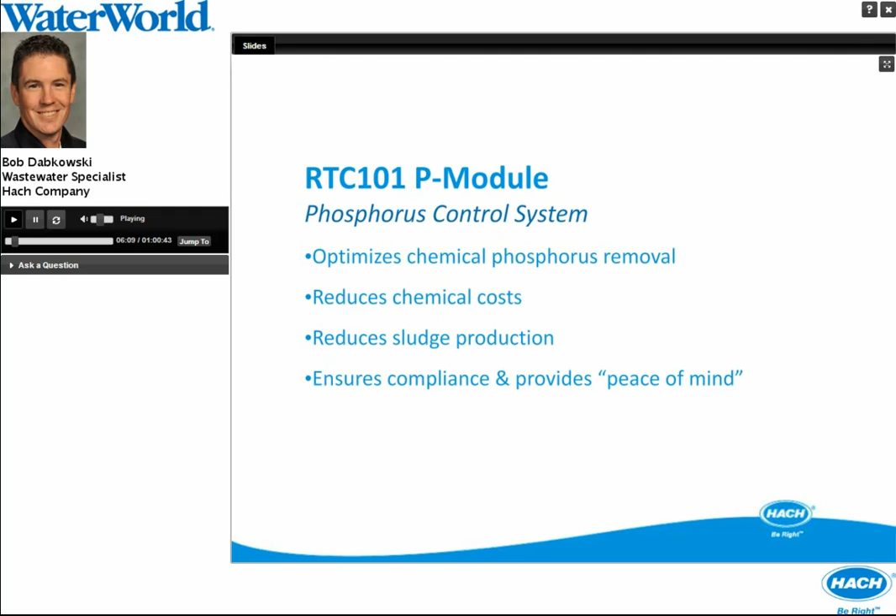So what does it do? What does it look like? Well, the chemical phosphorus removal controller starts with an orthophosphate analyzer and a sample preparation system. We use the Phosphax analyzer, that's a Hach product, and the Filtrax, which is a 0.15 micron filtration system that can be immersed directly into the basin, into the tank, into the channel, wherever you want to pull a sample from. It filters the sample and delivers it to the instrument. They're designed to work together.

That's connected to an SC1000. The SC1000 is our transmitter, our controller, depending on your language. This is the interface for the Phosphax analyzer where you can set your output signals, you can make manipulations to the settings of the instrument, change the display, things like that, and different communication capabilities such as Modbus, Profibus, wireless, Ethernet, etc.

And the third component is the actual RTC, or real-time controller. This is a device which basically, for those of you in the control world, is a mini PLC. But contained in that mini PLC are input cards, so we can pull, say, a flow measurement from the existing PLC, and an output card, which has a 4-to-20 or Modbus output for the dose of chemical in real time. Also inside of that are the actual algorithms where we're performing the math and updating the output every minute. Typically that RTC unit gets installed in a PLC cabinet. That way when we're pulling signals out of the existing PLC and putting them back into the PLC, it's very simple, right? We can just use the existing wires, inputs and output cards.

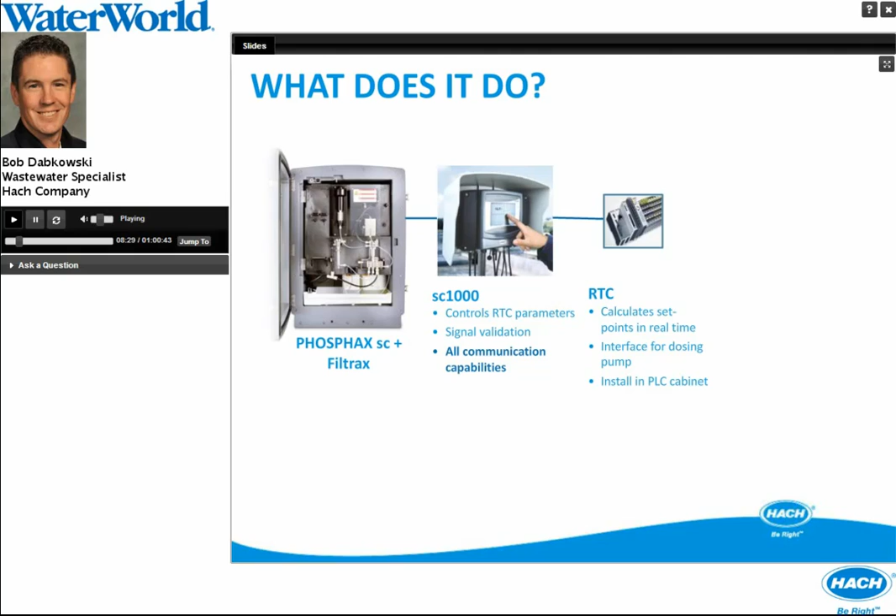It doesn't always have to be plugged into a PLC though. For this particular module, if the chemical feed pump, say, can accept a 4-to-20 milliamp signal, we can send that directly to the pump. It doesn't have to go back into a PLC. Those three components are what we supply.

What we also need is a flow measurement. Whether it's influent to the plant or plant effluent flow, we need a flow signal because, of course, we're talking about phosphorus loading. We're not talking about just concentration. And then the output from that RTC goes either back into the PLC to control a dose pump or directly to the pump itself. The pump that, of course, is adding our ferric, our alum, polyaluminum chloride, etc.

And last, but certainly not least, are services. With this real-time controller and the SC1000, we have the ability to access and view this system remotely. So the benefit there is our tech support people can dial in once a week, check on the system, make sure everything's functioning correctly, make any changes that may be necessary, of course, with end user permission and the client's permission, and also put together and compile the data and issue a report if that's what the end user desires. That ongoing service is included in the RTC package. The nice thing here is it's one point of contact.

For example, if we were to build one of these systems from scratch, I like to use the analogy that if I want to build a thermostat to control my air conditioning in my house because, gosh, it gets really hot here in the summertime, I could go down to Radio Shack and buy components and circuit boards and everything I need to build my own thermostat. Or I could just go down to Home Depot or Lowe's or Ace Hardware and buy a thermostat off the shelf, right? The difference there, though, when you think about that analogy is that if I build a thermostat from scratch, if something goes wrong with it, who am I going to call? I have to go and troubleshoot it. And what if I'm out of town and my wife calls and says, hey, the thermostat you built, it's not working. Well, I'm out of town. I can't help. Same thing, when we build systems from scratch, who do we need to support them?

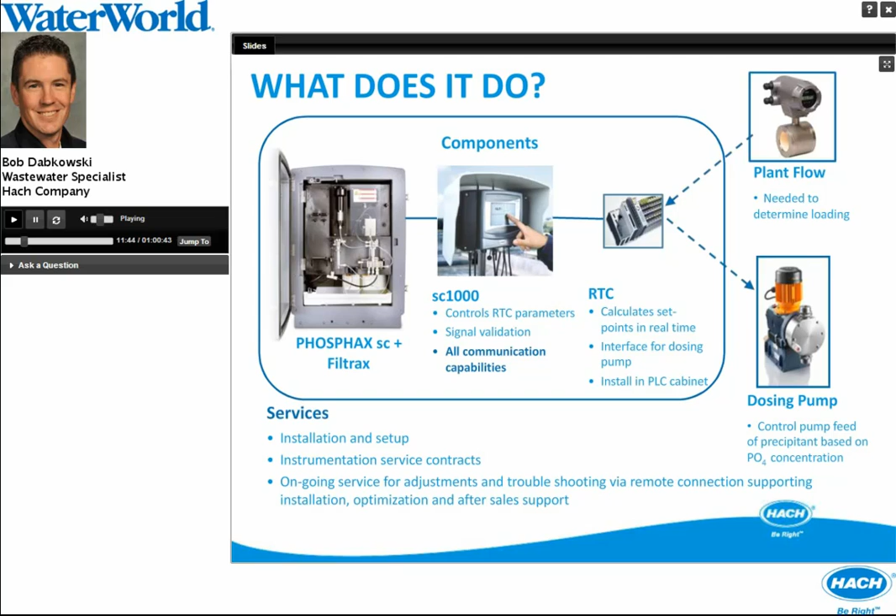Installation options for the Phosphorus controller. There's two different ways we can use this Phosphorus controller. The first and the most common is in a feedback control loop. So for those of you maybe not aware, feedback control or closed loop control means we're measuring the process after we've performed the process. So as you can see in this diagram, we're measuring the phosphate concentration after we've added

the chemical. So in this particular example, the nice benefit is if we make a set point of 0.6 milligrams per liter orthophosphate, we're measuring the result of that process. So you can see through the analyzer if it's at 0.6 or if it's not at 0.6, and then feed back upstream to control that process and add more chemical or add less chemical. It also has the least amount of process risk. Process risk being, of course, in a feedback loop system like this, there's very little risk that you'll be out of compliance. If your compliance value is 1 milligram per liter total phosphorus and you're always running at 0.6, this system will make sure you're staying at 0.6. Low risk.

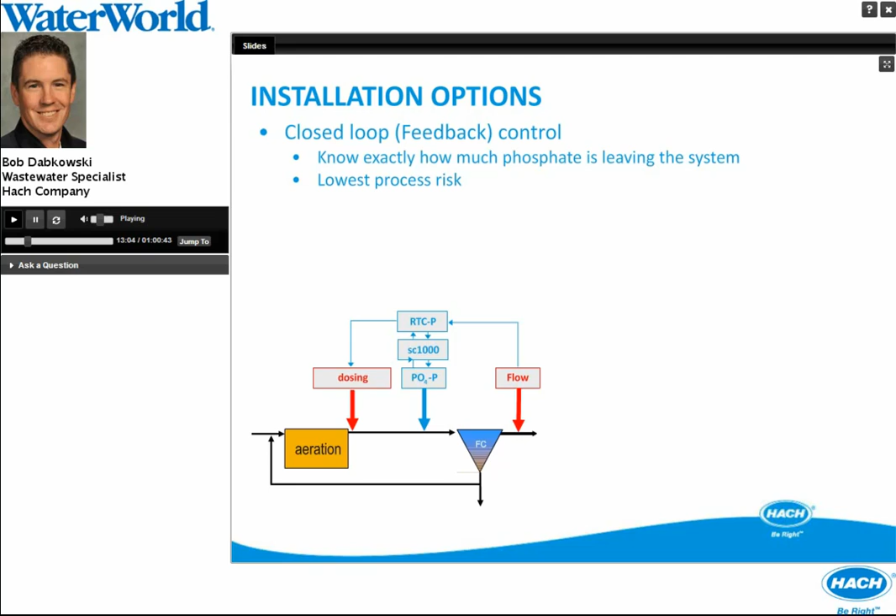However, not every process can be automated in that manner. And sometimes we have to do feed-forward or open-loop control. The difference here is open-loop control is based on measuring before we add the chemical or before we actually perform the process. That requires some sort of predictive model be installed in the controller. All of that is included in the RTC module. It's already there. It's just a matter of which one are we going to use. So when it shows up on site and it's installed, it's just a matter of picking either the feed-forward or the feedback. There's no special software that needs to be shipped in and downloaded or anything like that.

The benefit for the feed-forward system is that if there are plants with large influent phosphorus swings, sometimes it's better to measure that swing before you add the chemical, because maybe the chemical dose point, we can't get close to that. Maybe we're measuring with the analyzer 2 to 4 hours detention time downstream. Well, that's no good. That's not a good control system. So in that case, a feed-forward or an open-loop system where we measure before the dose would be more effective.

However, there is a little higher level of risk. We don't know exactly how much phosphate or total phosphorus is leaving the plant. All we can do is estimate that or put another instrument on the end of the plant, maybe run some grab samples, maybe a composite sampler, but with straight open loop or straight feed-forward control, it is just that. We're measuring before we perform the action. And so we do not know exactly how much is leaving like we would with closed loop.

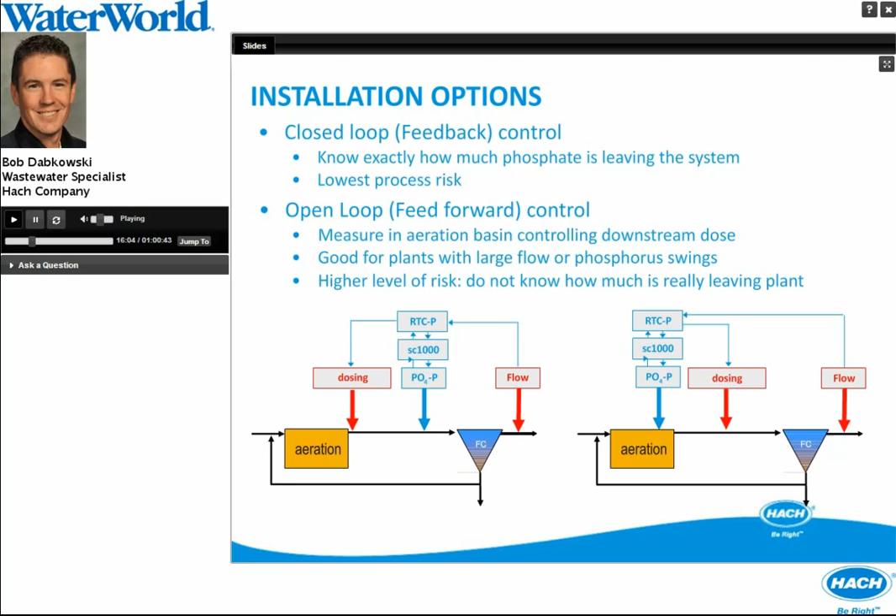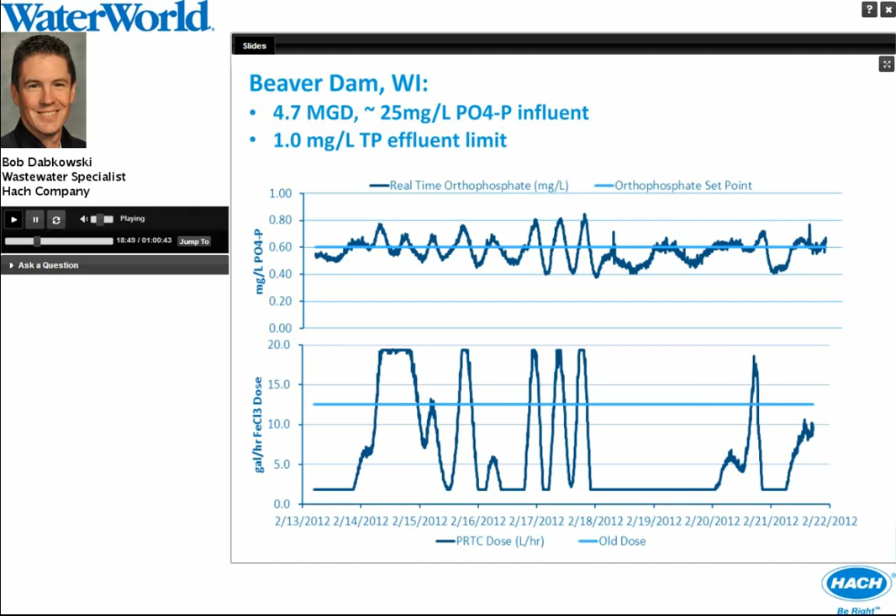At Beaver Dam, this particular site was a 56% reduction in ferric chloride. So based on the 12.5 gallons per hour they were feeding to the real-time controller's dose, the difference was 56%. In essence, when we did the math on that, on the installed cost of the phosphorus control system, the return on investment was 6.8 months. I thought about rounding that to 7 months, but 6.8 just seemed to have a better ring to it. So at Beaver Dam, they paid for the installed cost of this system in 6.8 months.

And again, 4.7 MGD plant with some pretty heavy, of course, influent phosphate numbers. We recognize every plant is going to be different. Every return on investment is going to be different. It may not be a fit at all locations. But we're certainly more than happy to evaluate that with you. We do have a team of individuals that can help evaluate your system and see if it's going to be a fit or not. So that's Beaver Dam, and again, we have these papers. If you'd like a copy, we can certainly get those to you, or if you have access to the WEFTEC proceedings, feel free to download it from WEFTEC.

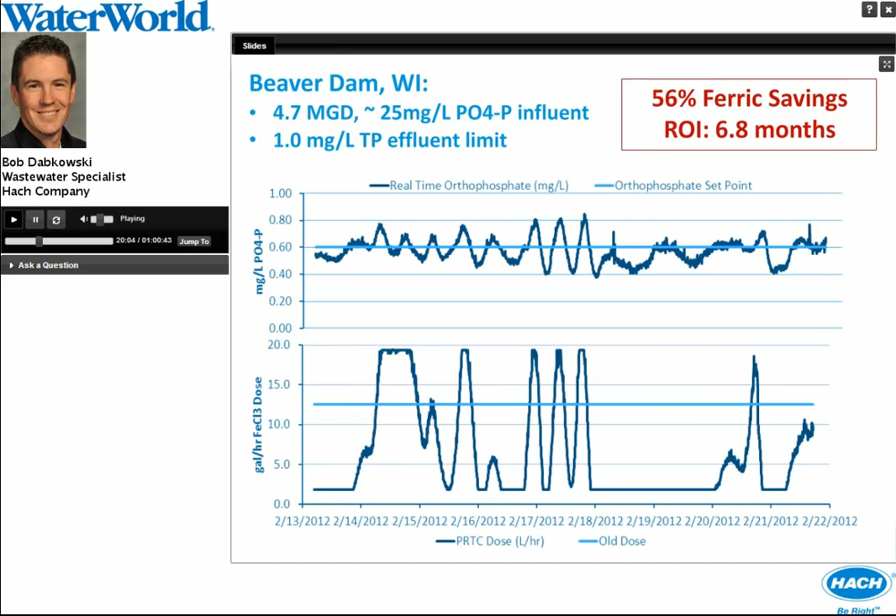Moving on. The next module I want to talk about is the Nitrification Control System, what we call the RTC 103. So we're shifting gears here. We've gone from phosphorus control to nitrification control now. And this particular module is designed for continuous flow plants. Think traditional activated sludge, aeration basin, clarifier. This is not designed for sequencing batch reactors or oxidation ditches. We'll talk about one in a few moments that is designed for that. So it's designed for continuous aeration.

The concept here is we're controlling aeration based on ammonia load in real time. The difference, of course, being most plants today control aeration based on a dissolved oxygen set point. So maybe the operator looks at the data from yesterday, looks at what may be happening later this week, maybe historical data, and says, today I want a DO of 2.5, and they type 2.5 into the SCADA. Well, this module is very similar in the fact, though, it's looking at the real-time ammonia coming into the aeration basin, and using a feed-forward model, it calculates the dissolved oxygen set point required to oxidize, to remove the ammonia to a certain set point that is also programmed into the SC1000. It changes that DO set point every 15 minutes.

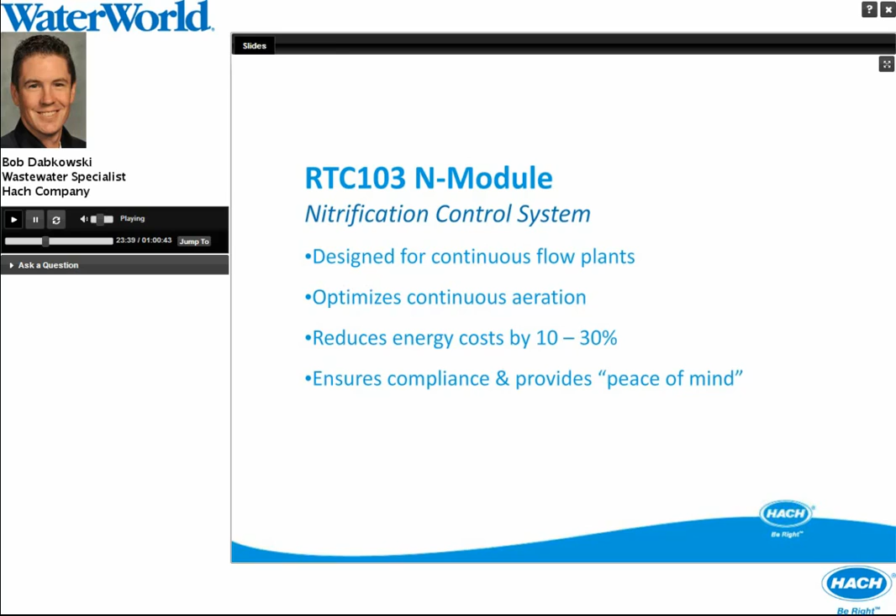So similar to the phosphorus controller, the components here for the nitrification controller begin with some sort of ammonia measurement. In this case, we're talking about the Amtax ammonia analyzer. Now, if I press the pause button here for just a second and opine, if you'll allow me, on the difference between analyzers and probes when it comes to ammonia, if you've seen us or went to our workshop at WEFTEC on instrumentation for nutrient removal, there are sensors on the market today which are ion selective for, say, ammonia or nitrate. However, those sensors today are similar to DO probes 12, 15 years ago. Membrane-style sensors that need to be cleaned, need to be calibrated, need to have the membranes replaced, et cetera, et cetera. They're higher maintenance than the analyzers.

So for me, as a controls person, if I want a good field sensor measuring ammonia and I want it to be reliable, I don't have to worry if it was calibrated correctly. I don't have to worry if it was cleaned properly this week. The analyzer makes more sense because analyzers clean themselves, they calibrate themselves, and they measure lower and more accurately. So from a controls perspective, it's win-win. There may be a little higher capital cost up front, but when you look at the return on investment or a 7-year cost of ownership, they're pretty much a wash. So I will get off my soapbox between analyzers and ion selective electrodes. There are certainly places for ISEs. I enjoy using them for trending, but when we're talking about control, we want better measurements.

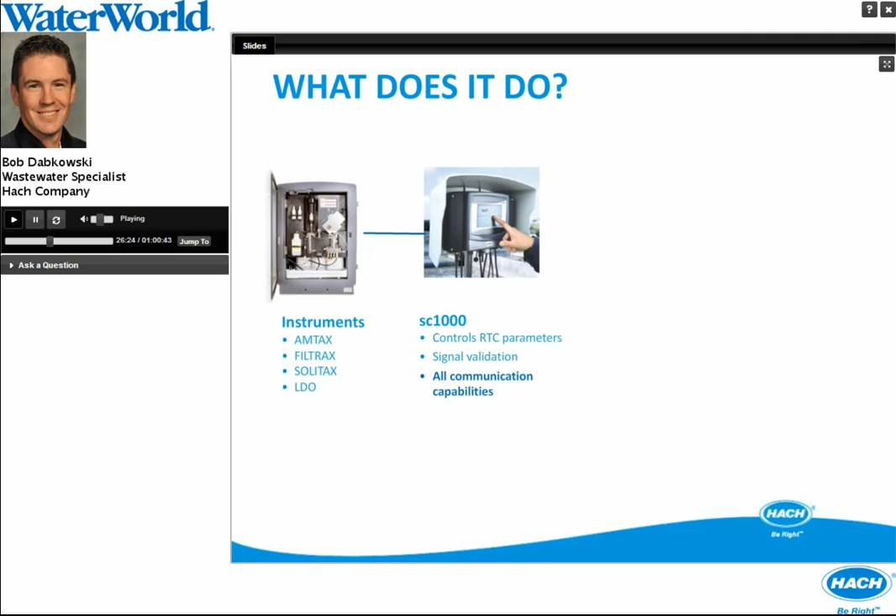Connecting to the SC1000, and again, that's where we interface with everything, with the instruments, with the real-time controller. All the programming, all the set point and data that needs to be entered is done through the touch screen of that SC1000. So for those of you who are familiar with RSLogix and the different ladder logic programming and function block diagrams, you don't have to know those in order to program the real-time controller. The real-time controller is completely programmed through the touch screen on the SC1000. So anybody with a pointer finger can do it. Also, the real-time controller there, just like with the phosphorus module, those are the components that are supplied off the shelf.

Like the Phosphorus controller, we're pulling in a flow measurement, so we understand the load of ammonia coming into our aeration tanks. And we output from the controller a dissolved oxygen set point. That set point is then fed back into the PLC, and that set point is then integrated into the PLC. So there's the differential and a little bit of a line that I want to draw.

We're not directly controlling airflow. We're not directly controlling header pressure. We're not directly controlling valve percentage if we're doing most open valve, things like that. All we're outputting is a DO set point. And your existing DO control system accepts that set point and then implements it.

One of the key pieces we've recognized is that good DO control systems are elegant, and they really do require good engineering and good integration. It's very difficult to have an off-the-shelf DO controller that's effective at a majority of the plants around the country. So in that case, that's where we drew the line. We will output a DO set point and let the existing aeration control system implement that set point.

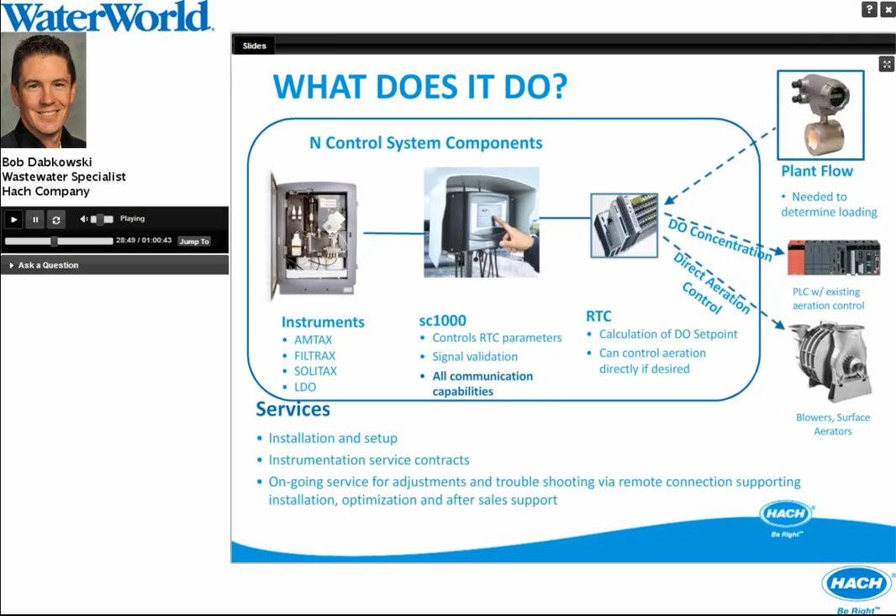Just like with the Phosphorus controller, recommended locations or recommended installation. Typically, we start by measuring ammonia coming into the aeration basin and ammonia leaving the aeration basin. So again, we need to know the load coming in, and then we're going to compare that to the effluent number, which is comparing to your set point. So through that SC1000, end user maybe says, hey, I want 1 milligram per liter or less of ammonia leaving my aeration tanks at all times.

The influent side measures the load, uses a feed-forward controller based on the activated sludge model for nitrification, a little bit more than that, but that's the base of it, and says your DO should be 2.5. Well, the downstream ammonia sensor acts as a feedback control loop. And based on the aeration tank size and the flow, it says, okay, 4 hours ago I suggested a DO of 2.5. How much ammonia is leaving right now? Oh, it's 1.0. Perfect. Don't make any change. But if it says, gosh, it's 0.5 or 0.2 ammonia leaving, hey, let's trim that feed-forward model and calibrate it to the process better. So we have, in tandem here, a feed-forward control system and a feedback working together.

Suspended solids and, of course, DO that we talked about as an option can also be fed into that SC1000. Highly recommend suspended solids be used with this system. So therefore, we do know the true mixed liquor suspended solids concentration in real time, and that helps us understand better the nitrification capacity of the system. All those sensors are connected to the SC1000, which is connected to the real-time controller, the N module, nitrification module, which is installed in a PLC cabinet for easy integration. And of course, that communicates back and forth with the PLC and the flow meter, and that's what our typical simplified installation diagram would look like.

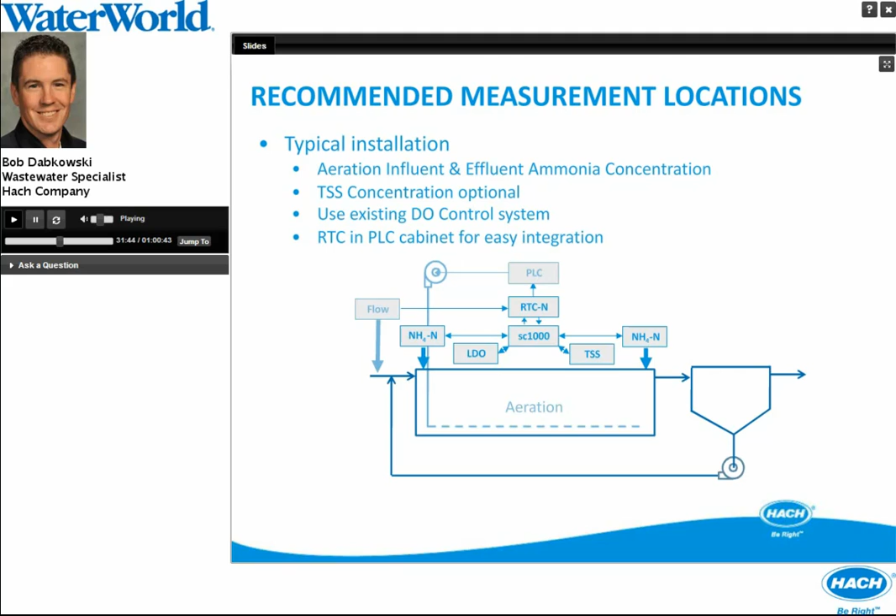Some case studies, in particular here, we're going to highlight 2 out of the UK. As I mentioned earlier, there are 41 installations of this module in Europe, and we are currently installing 2 in the United States. The first is in Bournemouth. When we look at these numbers, what I want to highlight is 30% less aeration energy is on top of good DO control. So, for example, they already had a good DO control system, and they were already controlling to a specific DO set point.

But what they found was maybe at a DO of 2.5, the ammonia was dropping to 0 halfway through the aeration basin. So the other half of the aeration basin wasn't doing any nitrification. It was just wasting air, frankly, keeping things mixing. And so in this case, by controlling based on the actual ammonia load, they were able to save an additional 30%, which, as you can see here, Great Britain pounds, GBP, was 80,000 a year. At the time this was written, I believe the conversion was about $1.60 per pound. So just to give you some U.S. dollars to Great Britain pound conversions.

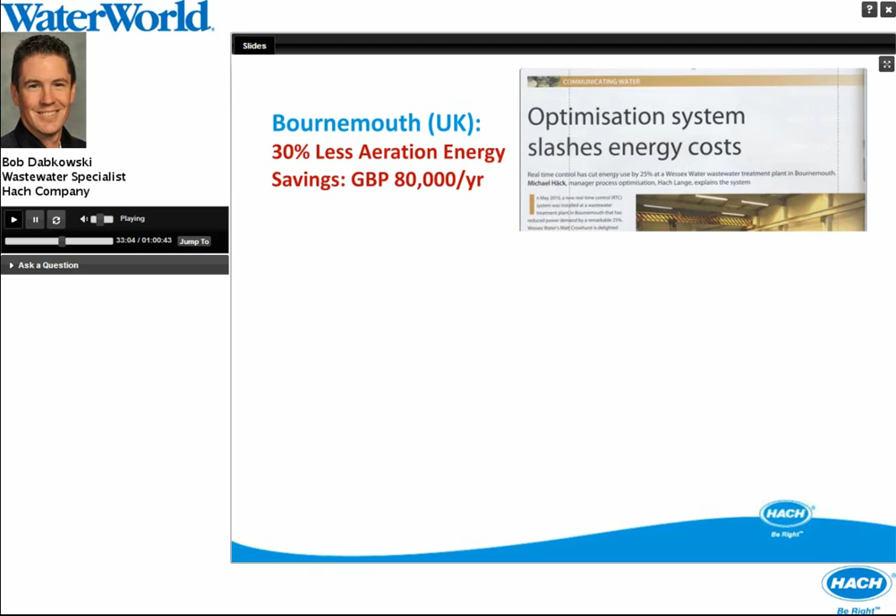Likewise, Southampton in the UK saw 20% less energy, and in their case the savings were much higher because they're a much larger facility. What we're looking at in the graph is the blue line, the RTC-controlled train, and the red line, a manually controlled, operator-controlled train. This was a fun data set to work with because we're looking at an experimental train and a control train. So this is almost like real science here.

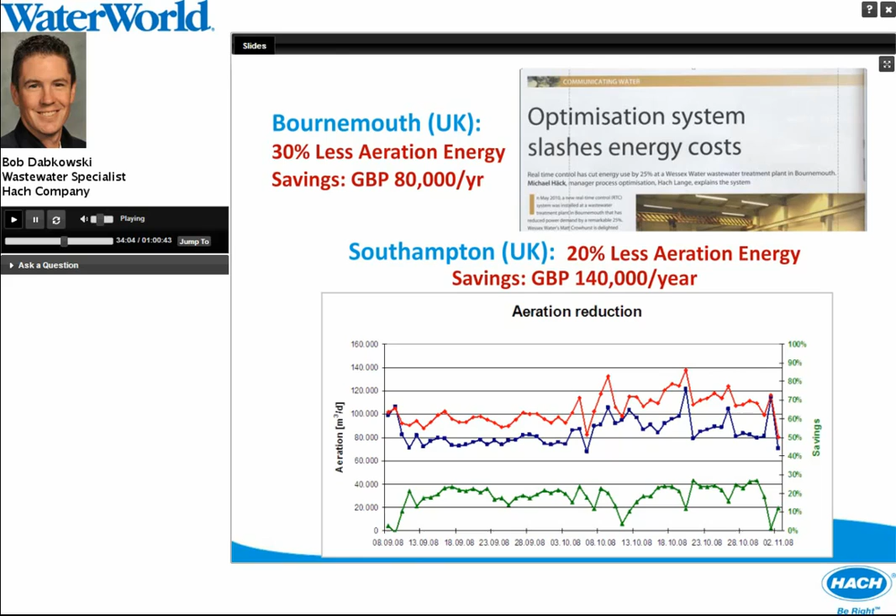You can see the blue line has significantly less aeration, less airflow, than the red manually controlled train. Now, I'm sure there's more than one of you looking at the green line and saying, wait a minute, Bob, all the way on the right, that green line drops to 0. There's a point where the operator-controlled and the RTC-controlled met, and they both fed the same amount of air. Yes, you're absolutely right. Keen observation. Good job. It's very difficult to make WebExes and podcasts interactive, so that's one way of doing it, I suppose.

Here is that data, a little bit closer, a little bit more fine. This is effluent ammonia with the blue and the red, and the gray line is the influent ammonia load. Under the standard control system, which was operator controlled, effluent ammonia crept up to about 13 milligrams per liter. You can see the big gray spike behind it as the influent load peaked, whereas the real-time controller limited it to about 5 milligrams per liter ammonia leaving the system. So even though they both used similar amounts of air, the amount of ammonia leaving the process was greatly reduced with the real-time controller.

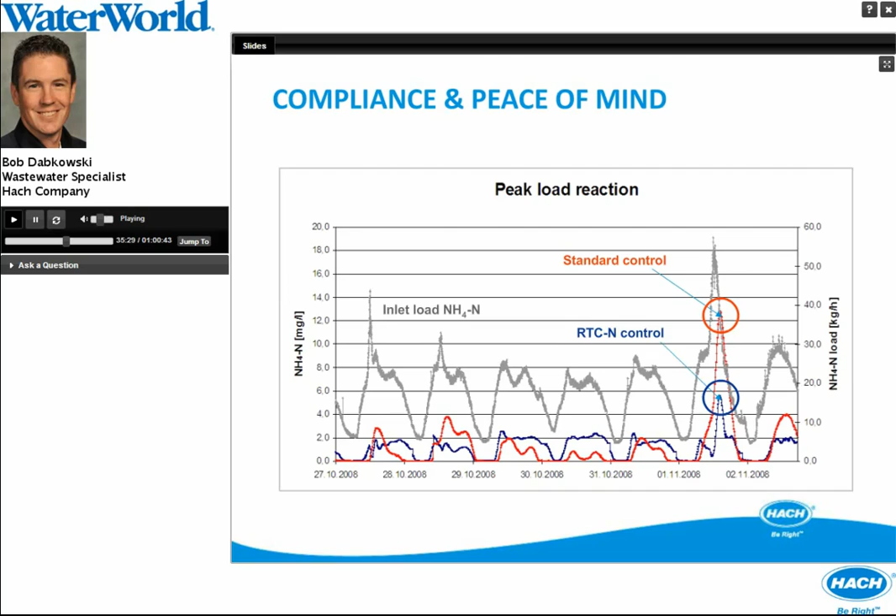As you can see in this data set, their target for ammonia leaving the aeration tanks was 2 milligrams per liter. Most of the time we remained under that 2 milligram per liter set point, and only with this large slug did it go over 2 milligrams with the real-time controller. When it did, it was very short and then immediately came back down. So those are some case studies and data out of Europe for the nitrification controller.

Last but not least, I want to move on to the final topic for today, the nitrification and denitrification control system. This system is designed for what we would call intermittent aeration processes. What do you mean by that? Well, plants that perform nitrification and maybe denitrification in the same tank. So an oxidation ditch that might perform on-off aeration, sequencing batch reactors that may perform both nitrification and denitrification in the same tank, Schreiber-type systems. Those types of processes.

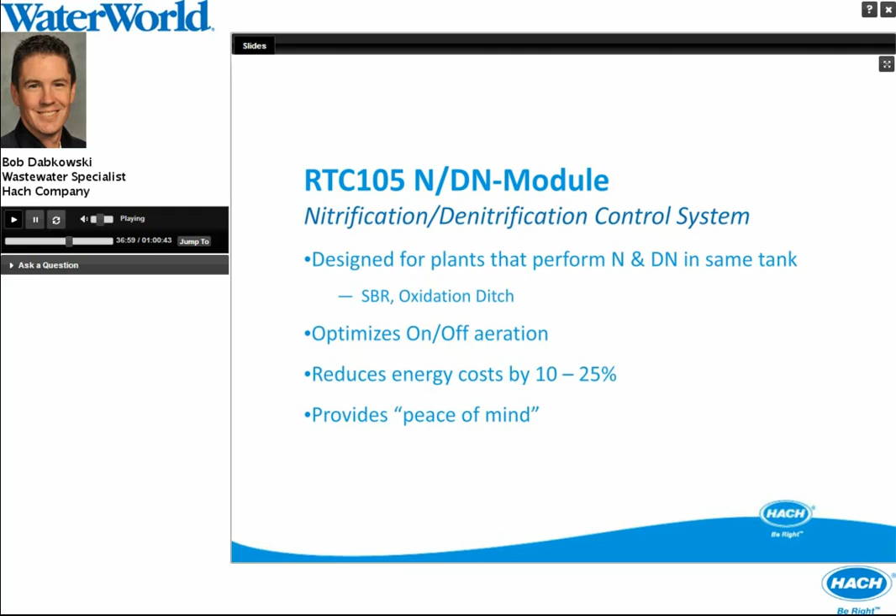What we've seen in Europe is 62 installations of this module, and we have a few lined up here in the United States, but again, nothing I can really speak to yet. We're seeing energy cost savings of 10 to 25% at those oxidation ditches and sequencing batch reactors. And again, that's on top of DO control. So I want to focus on that: this is not just going from no control to perfect nitrification, denitrification control. This is going from good DO control to enhanced process control based on actual water quality.

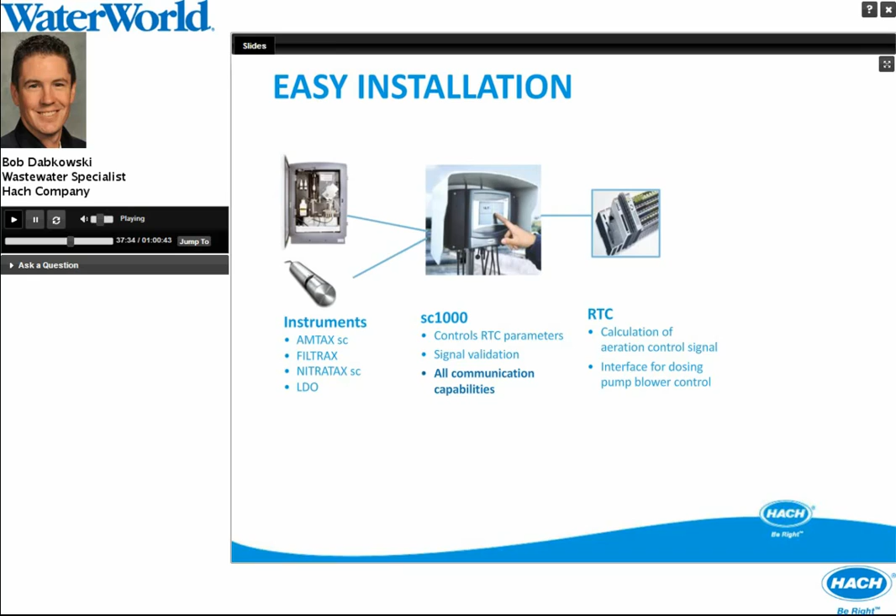The pieces and components, just like with the previous two, start off with sensors, whether that be the Amtax for ammonia, the Filtrax sample delivery system, the NITRATAX for nitrate, DO sensors, etc. Integrated into that SC1000, which is also communicating with the RTC. And like the other modules, all the programming and all the set points are entered in the SC1000 touchscreen. We're bringing in a flow measurement, so we understand the load coming into the process, and simply outputting back to the PLC or maybe directly to the aeration system, depending on the plant. Either the air is on or the air is off.

So if you think about it, what we're doing here is using ammonia and nitrate targets that are entered into that SC1000. If you think about an oxidation ditch with 2 brush aerators, maybe when it says, okay, turn on the air, we need to nitrify, my ammonia is too far away from my target. It'll aerate and nitrify until the ammonia is brought down beneath the target value, and then it'll look at the nitrate and say, nitrate also is above my target value.

Let's turn the air off. So one of those brush aerators will turn off, and again, as long as there's sufficient mixing, it will denitrify until the nitrate set point is reached. And the nice thing about this particular unit is there are not just targets or set points that get entered, but also weights that can be adjusted.

So perhaps we're in California and we're dealing with Title 22 reuse water, and we need to be below 10 milligrams per liter total nitrogen. Maybe we've never had a problem nitrifying, but gosh, denitrification is challenging with my plant, with my ditch. So we could add a greater weight to the nitrate target, and therefore it may spend more time denitrifying than nitrifying, because it recognizes the nitrification capacity is faster and better at that particular process.

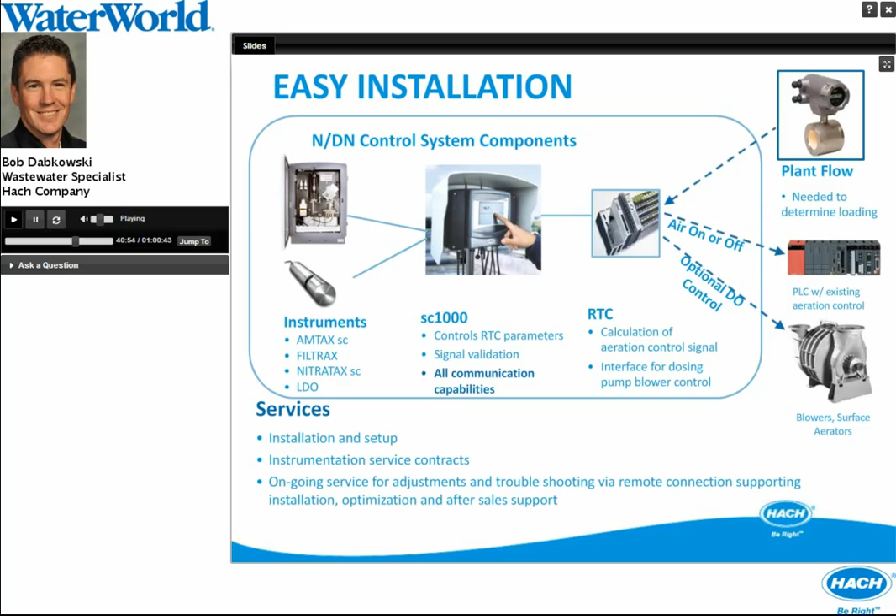Here is a case study out of Europe. Again, 62 installations in Europe, working on 2 here in the U.S. This is an industrial facility. So for those of you on the phone who work for various industrial firms, this might be of interest to you, a specific industrial application. There's a leather production facility, a tannery. And if any of you have ever been to a tannery or understand the chemicals that go into tanning leather, you'll recognize that wastewater treatment at a tannery can be both an art and a science. It's very difficult. This particular plant had an oxidation ditch that was trying to meet total nitrogen limits and get less energy consumption.

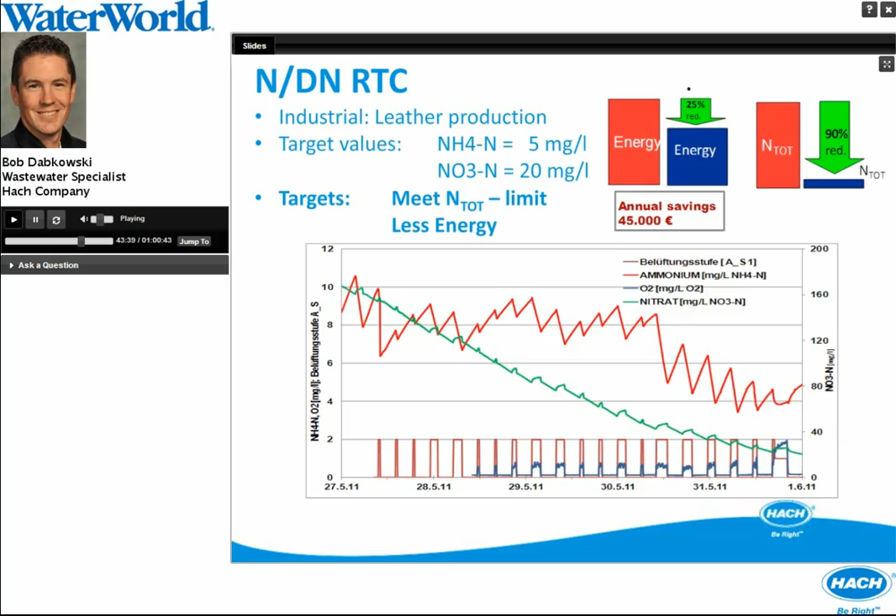So to summarize, and then we'll have time for questions. I see there are several, and I appreciate that. Please, if you have questions, type them in. I do want to get to those questions, as many as possible, and if not, I'll call you or email you with replies. First and foremost, we talked about chemical phosphorus removal. Benefit there, reducing the precipitant use, the ferric chloride, the alum, the polyaluminum chloride, and reducing sludge production. To date, about 130 installations of this particular module between Europe and North America.

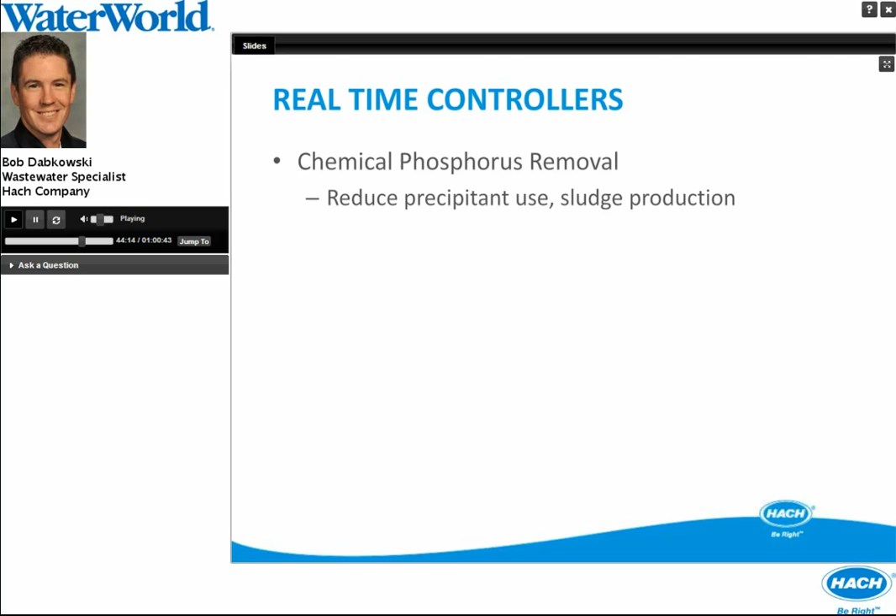Secondly, we talked about the nitrification controller. This was basically ammonia-based aeration control, reducing aeration energy and better control of influent spikes, whether they come from the collection system or from centrates and our wet wells that suddenly kick on and dump into the influent.

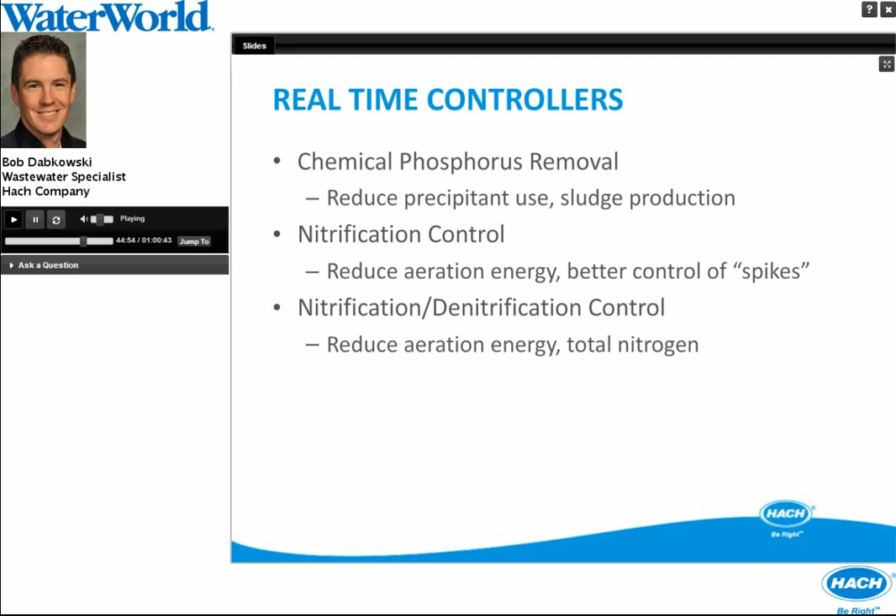And the third module we spoke about was the nitrification and denitrification controller. Again, the concept there was to reduce aeration energy and total nitrogen. There are 62 of those installed so far, and 41 of the nitrification controllers. And that's the concept we're talking about, these off-the-shelf real-time controllers.

There are more modules in the pipeline, if you will. If you keep your eyes peeled on Hach.com, you'll see more and more of them be launched as we roll these different modules out for different applications. And these are the three we're focusing on today.

Appreciate your time and attention. Hopefully I've been able to keep your attention. I know that can be a challenge. And at this time, I'm going to look at the questions. And just to verify, I believe we have 15 minutes. Is that correct for questions? That's correct. Thank you.

So let's answer some questions. Holy moly. Thank you for submitting questions. And if you still have more questions to add, please do so. We will get to them.

First question, you mentioned the Wisconsin plant, Beaver Dam, was up and running in a day. Is that standard? Yes, that is standard. The Beaver Dam location, we shipped everything on site, had everything installed, literally the analyzer installed in a day. The RTC was in the PLC cabinet. The integrator was on site pulling 4-20s and landing 4-20s. Everything was up and communicating in a day and turned on, controlling their ferric chloride dose in real time.